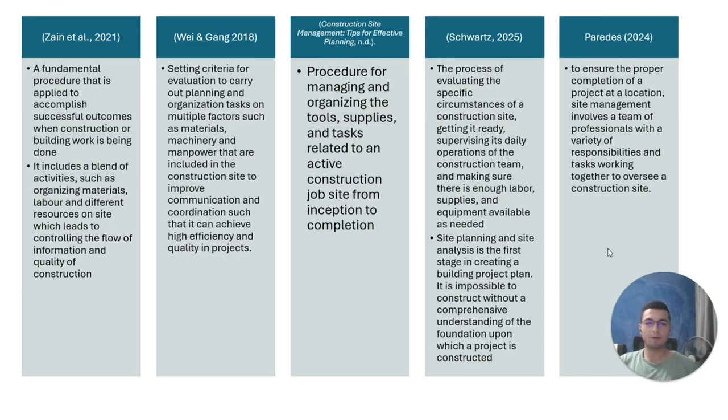My first part of the presentation will be about defining site management. As you can see in literature, there are several different definitions of site management. However, they are not complete, so I've combined all the definitions that I found into one complete definition.

The combined definition of site management is a comprehensive procedure that involves planning, organizing, and controlling all activities on a construction site. It includes evaluation and preparation of site condition, effective supervision of daily operations, and coordinated management of materials, manpower, machinery, and equipment. This process involves setting performance criteria, improving communication and coordination, and ensuring that the construction team works efficiently and with high quality.

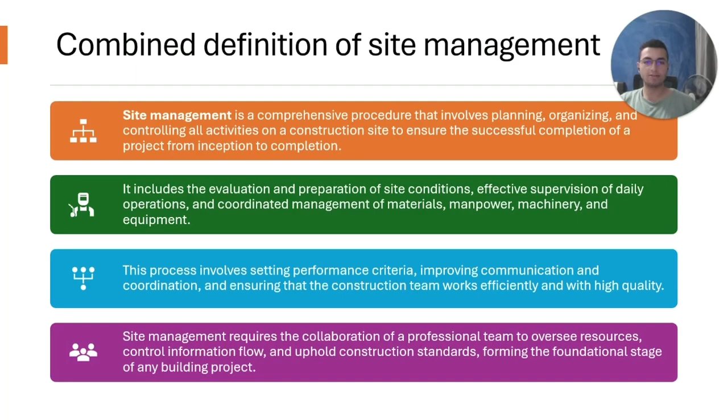Site management requires the collaboration of a professional team to oversee resources, control information flow, and uphold construction standards, forming the foundation stage of any building project.

Now moving on to the significance of site management in construction projects. This can be concluded by these points: assessing a location's physical limitations, hazards, legal issues, and potential, and identifying environmental zoning and access issues that could jeopardize the project's timeliness and profitability.

Furthermore, it includes managing the project's budget, schedule, safety regulations, and quality control, and ensuring stakeholder interactions, so that the project is finished according to specifications, on time, and within budget.

Furthermore, it also concerns ensuring the quality and safety of works done on construction sites. Finally, efficient communication to keep all stakeholders in sync is the responsibility of the site manager, as he acts as a liaison between the client, subcontractor, design team, or in short, all the stakeholders.

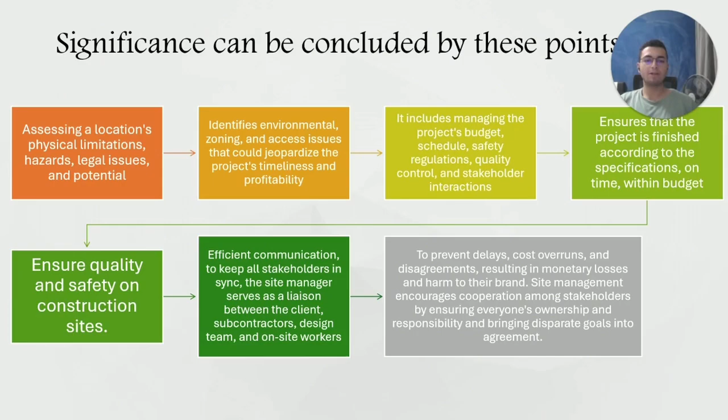So, to prevent delays, cost overruns, and disagreements resulting in monetary losses and harms, site management encourages cooperation among stakeholders by ensuring everyone's ownership and responsibility, and by bringing disparate goals into agreement.

Moving on to the key principles of effective site management. There are 5 key principles to be followed according to Crum. The first is solid plan: creating a plan which is flexible enough to adjust if circumstances change, while still communicating all the changes to the stakeholders.

The next principle is efficient resource management, because it's not enough to have the appropriate tools and supplies on hand. It also requires having the correct personnel to use them efficiently and to have it all at the right moment. Furthermore, success-oriented scheduling is important because awareness of resource availability, potential restrictions, and project relationships gives the ability to predict and avoid delays before they even affect the timeline.

Next, we have risk management, using tools for construction project management which are crucial for spotting and reducing possible risks in building projects. Proactive risk management is a key component of successful construction, as they use technologies to enable them to spot any problem early and act accordingly.

Finally, the 5th key principle is financial accountability, where putting financial tracking systems into place has proven that real-time budget visibility may change the course of a project, with teams making better judgments and decisions, keeping tighter control over project costs when they can understand exactly where they stand financially at a given time.

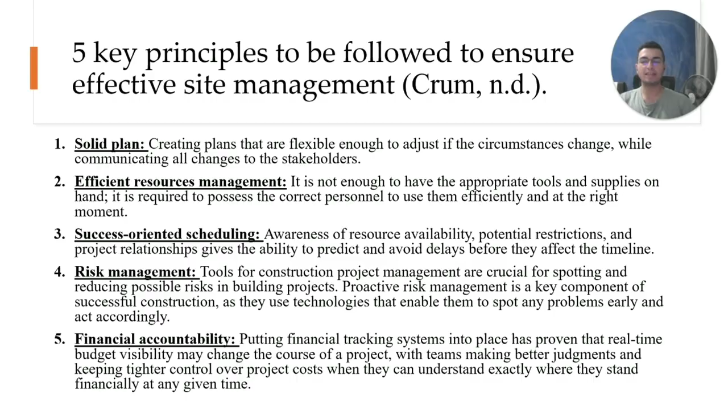Next, we have identifying challenges and best practices based on research literature. Starting with the challenges, based on our literature, we found challenges that have been mentioned, starting with the characteristics of site management, which means the negative personal traits of the person responsible for site management.

Moving on, we have poor coordination between structural, architectural, mechanical, and electrical teams, which causes delay and rework. Furthermore, we have poor communication or miscommunication of technical instructions, unclear information, and delays in sharing data among stakeholders, which leads to project delays, cost overruns, and quality issues.

Moving on to the next, which is poor documentation, where discrepancies in drawings, incomplete filing systems, and missing critical documents like inspection and test procedure (ITP) and method statements all cause delays. Poor resource management, such as unsuitable materials, insufficient supply, and poor waste management practices, have also caused delay in progress and compromised building quality.

Finally, we have poor environmental preparedness, where poor site conditions such as the lack of sediment traps, waste centers, lighting, and ventilation created an unsafe and inefficient work environment.

Now we are going to discuss the best practices which contradict these challenges, also from literature. We start with the first one, which is leadership, where leaders must encourage collaboration at all levels and prioritize transparency, which can help resolve conflicts quickly.

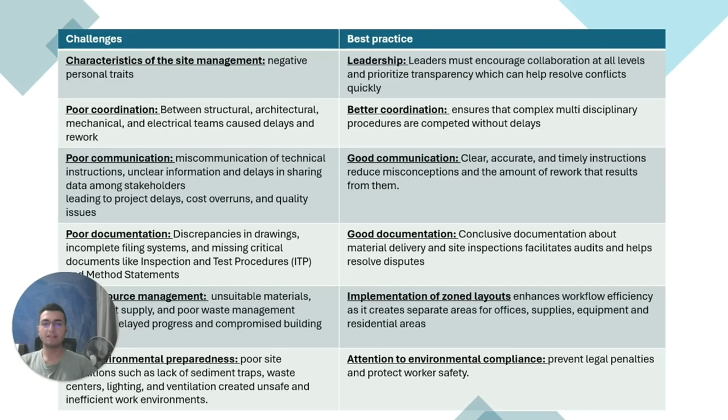and helps resolve disputes. Next, we have attention to environmental compliance, which prevents legal penalties and protects worker safety. Finally, we have implementation of zoned layouts, which enhances workflow efficiency as it creates separate areas for offices, supplies, equipment, and residential areas. That's all from me.

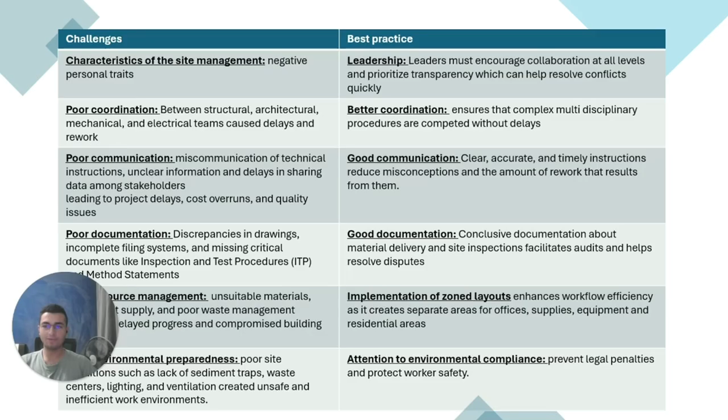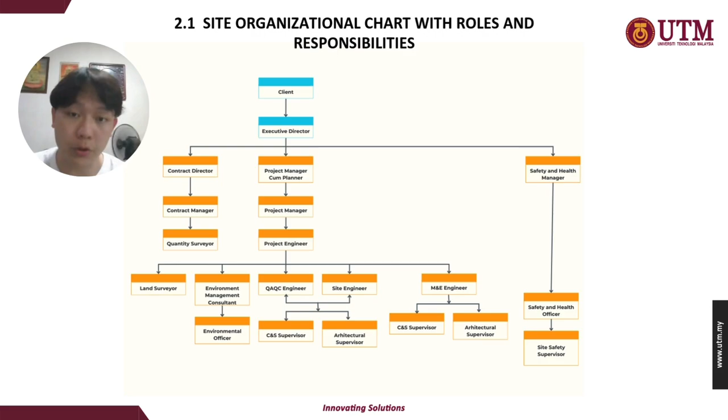First and foremost, I would like to explain the site organizational chart with roles and responsibilities. As you can see in the diagram, we have 21 positions according to this project site at Bukit Makota, Kuala Lumpur.

Furthermore, this is our framework for each role and their responsibility. According to the hierarchy, the first one is the client. The client is the government client, because our project is a government project. It is used to fund the project, assess objectives, and approve milestones.

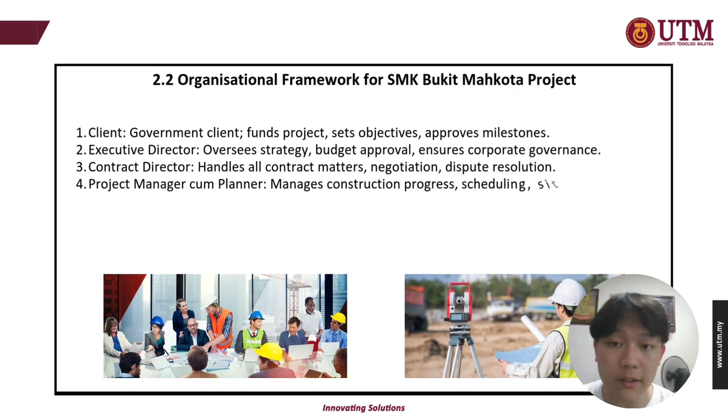Second is the executive director, who oversees the strategy, budget approval, and ensures corporate governance. Third is the contract director, who handles all contract matters, negotiation, and dispute resolution.

Next is the project manager, who manages the construction progress, scheduling, site safety compliance. Next is the contract manager, who oversees project finance, payment claims, and budget control. Next is the quantity surveyor, who prepares cost estimates, tenders, and controls costs.

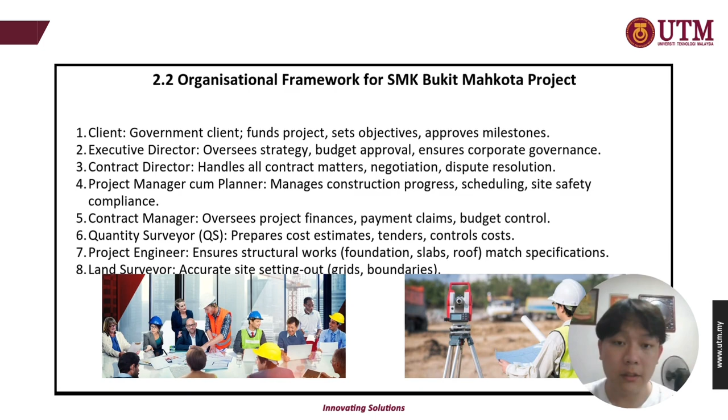The second to last is the project engineer, who ensures structural works - foundation, slab, roof - match the specification. The last is the land surveyor, who helps with accurate setting out, which is the grid and boundaries. Apart from that, I would like to continue about our organization framework.

The first is the environmental management consultant, who helps advise on silt, waste, water, and noise control. Next is the QA/QC engineer, who conducts inspections and ensures workmanship standards and material quality.

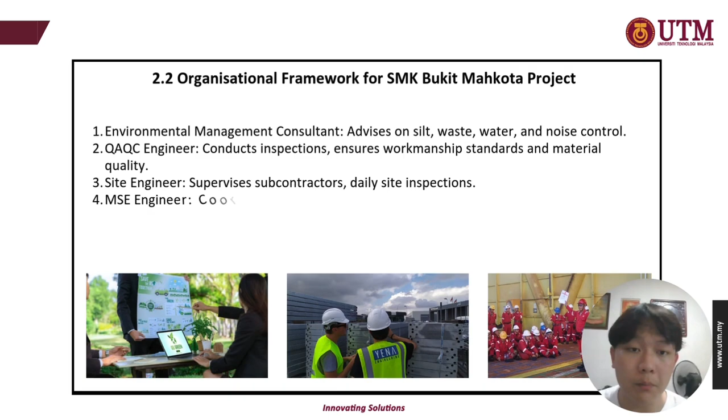Next is the site engineer, who supervises the subcontractors' daily site inspection. Next is the MSE engineer, who coordinates mechanical, electrical, and structural services. Next is the safety and health officer (SHO), who monitors daily site safety and conducts safety talks.

Next is the C&S supervisor, who ensures the structure work complies with design standards. Second to last is the environmental officer, who maintains environmental protection on site. Last but not least is the architecture supervisor, who ensures the finishes meet architectural design and quality.

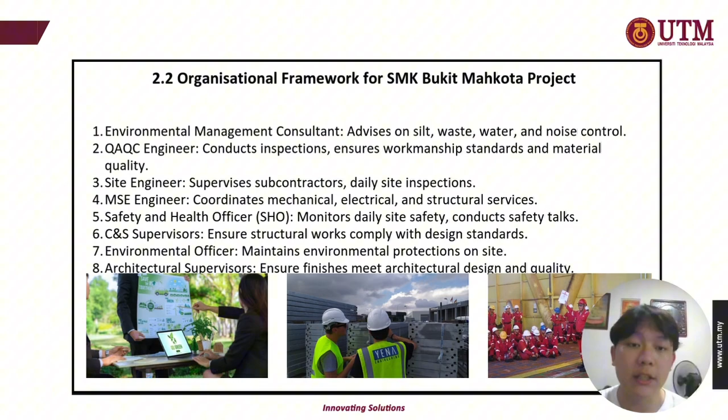Besides this, I would like to identify and explain the site preparation steps in logistics, material handling, and safety planning. The first is site clearing and earthworks, which requires clearing vegetation, removing unsuitable soil, and silt control measures. Next is surveying and setting out.

This helps to accurately position the blocks and structures. Next is temporary access roads, which are for efficient material movement and site access. The last is material handling.

This helps to control delivery, storage, and relocation to avoid damage and congestion. Last but not least is safety planning.

So we need to appoint a site safety supervisor (SSS) with JKKP registration, site fencing, warning signage, PPE allocation - which means giving masks, safety boots, and safety vests to the workers - and safety and environment training for workers and the site engineer. The last is the emergency response plan based on CIDB and SOCSO standards.

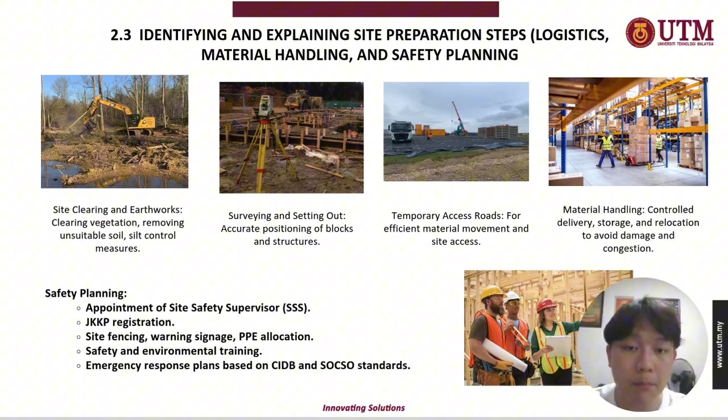Good day everyone. Today we will delve into construction site layout planning for the SMK Bukit Mahkota project. We have developed a comprehensive plan to ensure efficient and safe construction site operation.

Site layout planning is a critical component of construction management. It involves the strategic arrangement of temporary facilities, equipment, and access roads to optimize workflow. This enhances safety and minimizes costs. For the SMK Bukit Mahkota project, valued at 53.2 million, we utilized CAD software and meticulously planned the site to support the project objectives.

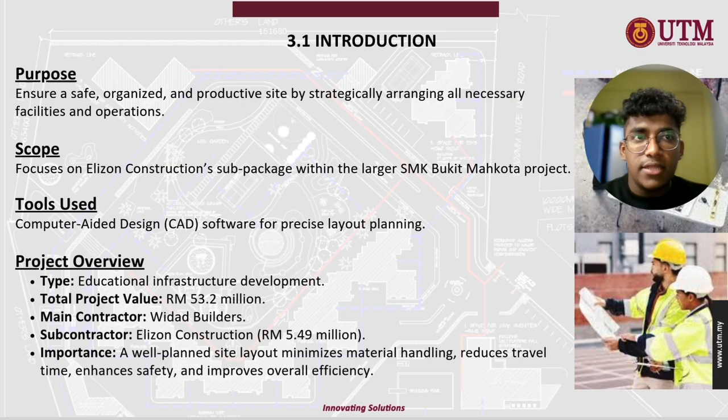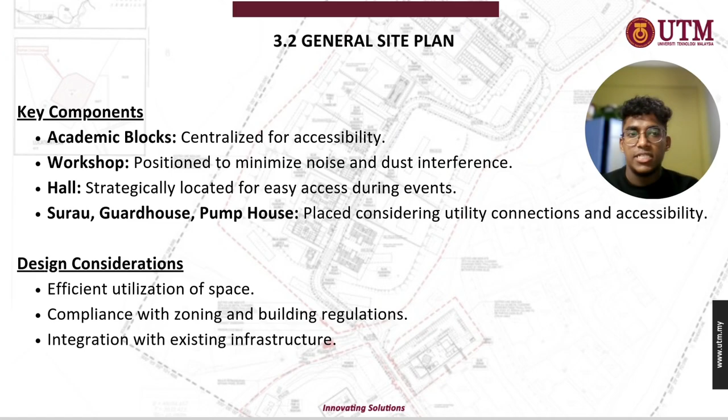Now let's move on to the logistic plan of the site. Efficient logistics are vital for smooth construction operations. Our logistic plan identifies key zones. The material storage area is near the entrance for easy delivery.

The guardhouse is positioned for optimal site security. The contractor and consultant offices are centrally located for effective communication between both parties. The wash trough and assembly areas are designated for workers' hygiene and gathering, and the emergency kit is located for easy accessibility in case of incidents. Clear signage and designated pathways ensure organized movement through the site.

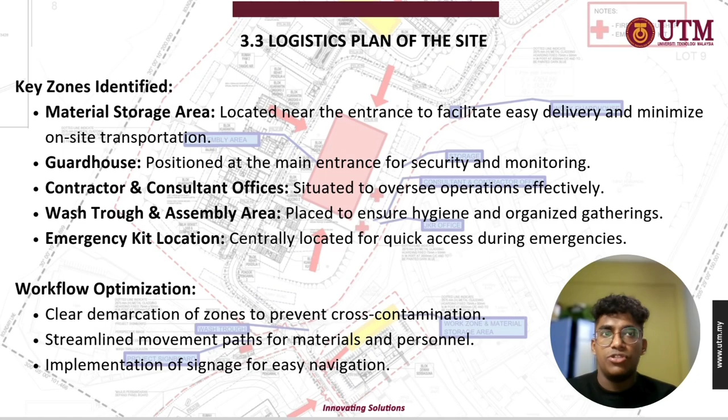Let's look into the justification of facility placement. Each facility's placement is deliberately arranged. Material storage near the entrance reduces transportation time. Office and first aid stations at the front corner provide quick access for staff and emergency services.

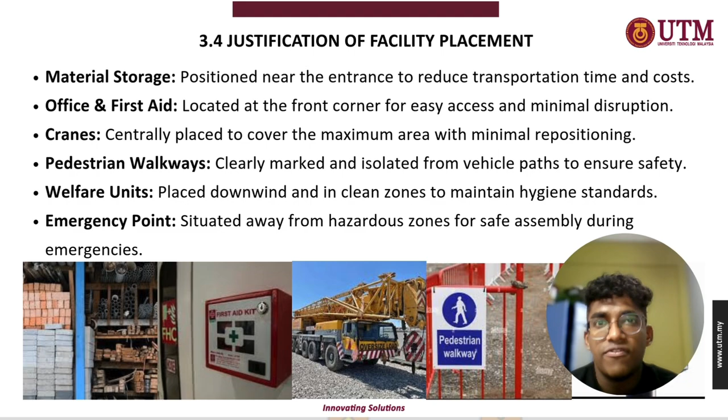Cranes are centrally located for optimal reach. Pedestrian walkways are isolated and clearly marked to prevent accidents. Welfare units are situated downwind in clean zones to maintain hygiene, and the emergency assembly point is positioned away from hazardous areas to ensure safety during evacuation.

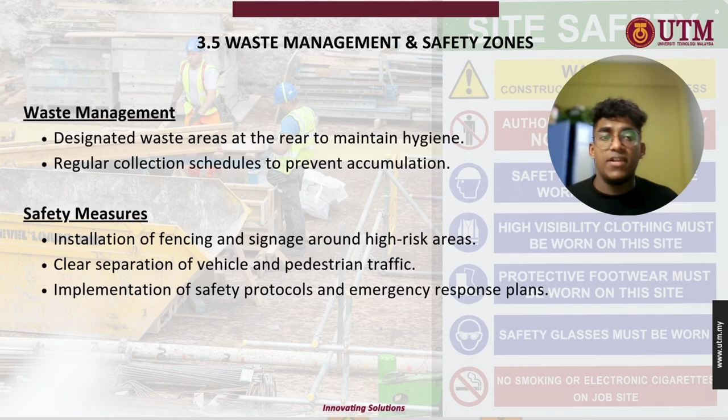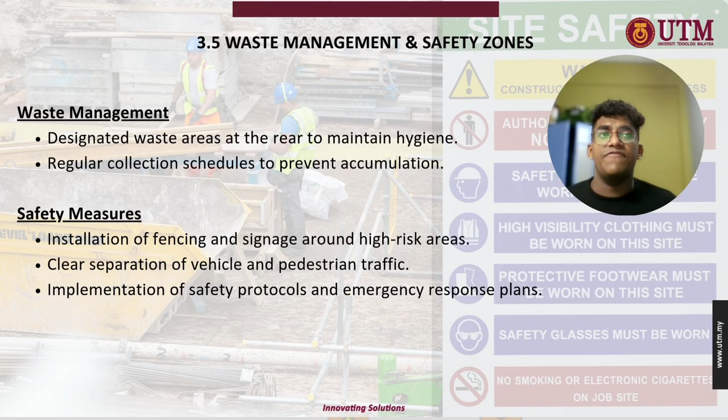Now let's move on to waste management and safety zones. Effective waste management is crucial for maintaining a safe, clean construction site. We have designated an area at the rear of the site to prevent obstruction and contamination. Safety zones are clearly marked with fencing and signage around high risk areas. Vehicle and pedestrian traffic are separated to minimize accidents, and regular safety audits are planned to ensure compliance with safety standards.

Now let's move on to optimizing for efficiency and safety. To optimize efficiency and safety, we have integrated engineering and safety considerations into the site layout. Short travel distances between facilities reduce time and energy expenditure. Logical sequencing of construction activities prevents workflow disruption.

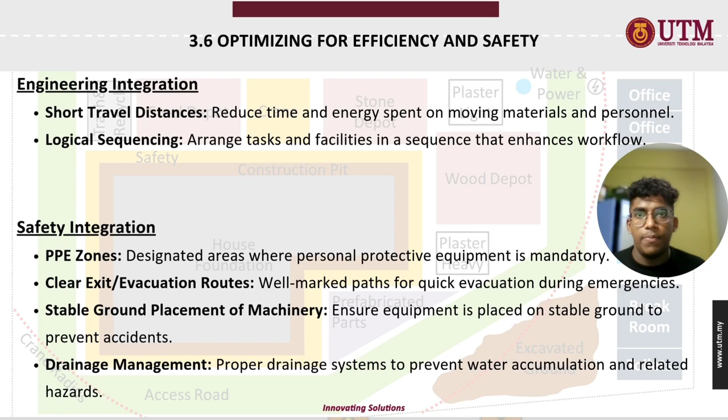PPE, personal protective equipment zones are established, and clear evacuation routes are mapped out. Machinery is placed on stable ground to prevent accidents, and proper drainage systems are implemented to manage water flow and prevent flooding and erosion.

In conclusion, our strategic site layout planning for the SMK Bukit Mahkota project aims to facilitate smooth logistics, uphold high safety standards, and ensure efficient workflow. By meticulously planning each aspect of the site, we lay a solid foundation for successful completion of the construction project.